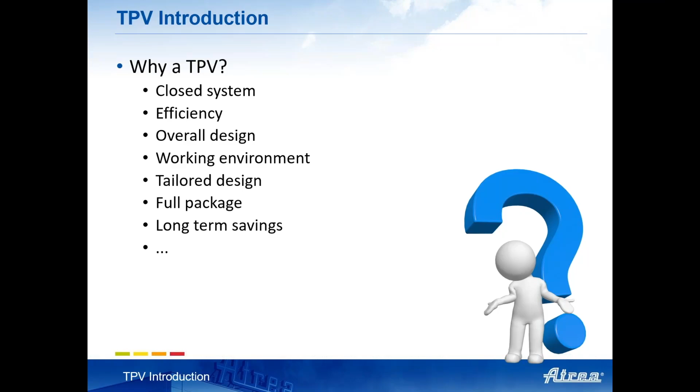This is the basic of basics. In my experience, usually customers are looking for such a solution when they don't have enough space for the installation. But when there is no room for hoods and ducting, you have to take into consideration that a ceiling is approximately 45 centimeters for the full construction, and then you will need more space for the ducting. In special cases, you have connections from sides from other rooms, if that's possible. I'll mention it later.

We have a project in Montenegro where the concrete ceiling is at 2.7 meters, and the lower edge of our TPV is at 2.15, with polycarbonate at 2.35. It's appropriate for works, but it wasn't possible for hoods to be installed, even with side connections. The ducts would be too big.

So some project types would be hotels, definitely. If you have contacts in hotels, resorts, or groups of hotels, you can mention it, send them a flyer or anything. They might be interested because mostly hotels have money and will want to reconstruct their kitchens more frequently than an object like a school. They will invest in it and keep it for 20 years, but hotels are more frequent with reconstructions.

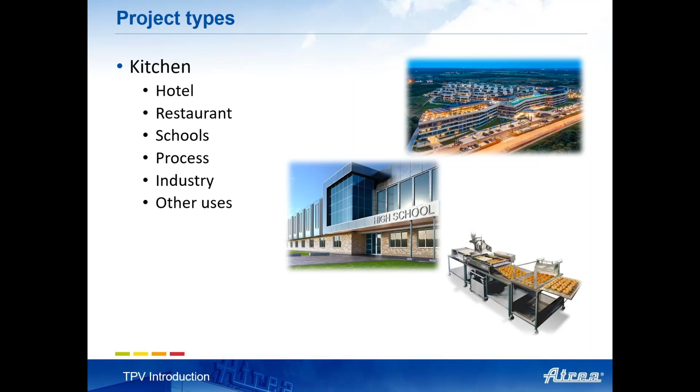So is it worth the investment? We all know that the price of a ceiling per square meter is higher than hoods, of course. Compared to other competitors, it depends on your market, but I believe we are on a good price, especially with the standard TPV ceiling.

Compared to hoods, when designing a ceiling, in the end you will most likely receive a lower airflow of the total room. You also don't have to take into consideration some parts of the kitchen which would have to be passively extracted without hoods - for example, a preparation room. There you can only put a supply duct and passive area with lighting if the room is open, or if there are air grills on the doors.

Lower airflow, of course, there's a caveat because it will depend on the ceiling height. If you have a ceiling at, say, 2.5 meters, then you are okay. If you have it lower, the airflow will increase because there's not enough room for air to spread, so there's more need for higher airflow to catch everything, not to have people bathing in steam. And in case of a higher ceiling, you will need higher airflow to achieve the opposite, because there's a lot more for the steam and grease to travel.

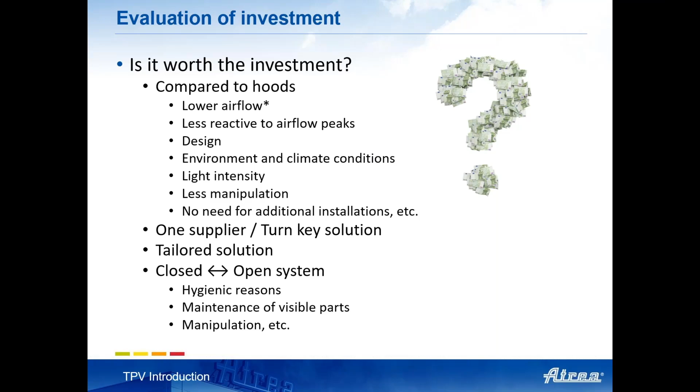So those are the two photos which are popular - you can also show them to customers. As you can see on the upper photo, it's a closed system, so there's no danger of mold producing, but on the photo below, you see there is steam, and you can even see on the wall behind this duct that mold is starting to form.

Probably you've seen these photos - the first and second are after one year of operation. Also, the standard solution for a TPV is that some of the supply air is blown into this upper part, so it's constantly in a small overpressure regime, just to avoid any leakage in case the rubber sealant gets broken, so it will constantly be in overpressure.

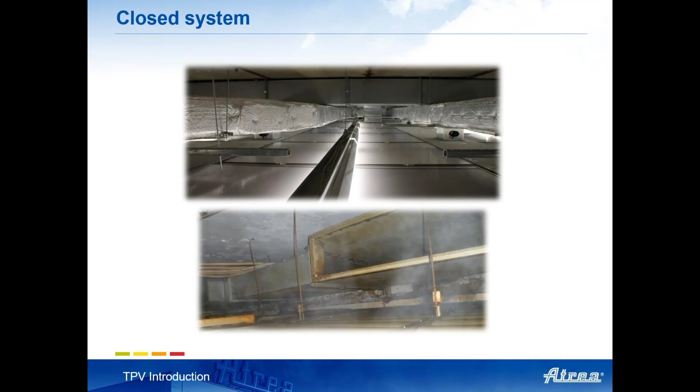So it's a tailored solution, as we mentioned - you can basically integrate other installations, it's only important to know about them at the right time. In the design stage, you'll have to ask your designer if there's a plan for any sensor installation, cameras, or additional lights, spotlights, fire suppression systems like ANSUL or standard sprinklers, or UVC filtration, or basically anything similar which can be implemented into the ceiling.

Because in that case, our kitchen department can prepare additional load bearing profiles which can withstand the weight of a camera, instead of the standard solution, which is meant only to take the load of the polycarbonate sheets.

It's adaptive construction, so it will implement into any room geometry or room purpose. So if it's a process kitchen - we had an example with frying, with the preparation of frozen groceries, you know, you can buy already frozen and prepared chicken nuggets or something like that, or even vegetables. They all have to be somehow prepared, so pre-cooked, and then they're frozen.

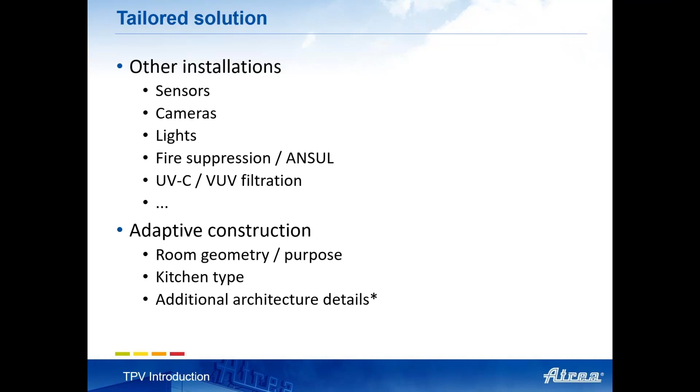And as for additional architecture details, basically the ceiling can be custom made regarding the ceiling color. So the sheets, as for aluminum, can be painted in a different color and not the standard RAL. And there can be some additional profiles which could be used for some decorative lamps. Why not?

So the 3 TPV types which we have, you all know, I hope: the standard TPV with full inox on extract and on supply, with polycarbonate covers with the lights above those, and with Prihoda PMI textile diffuser. The good thing with this Prihoda is that there are a lot of certificates which prove their hygienic use. So this PMI can even be used for medications production or for clean rooms, basically. So this is also an advantage for our ceiling.

The second one is TPVN, fully stainless steel with Prihoda cover option, so you can have perforated stainless steel below it as some decorative design. Or in case the customer is skeptic, because Prihoda will not burn, but it will drop when there is a fire in the room. But in case of the stainless steel cover, the customer is safe of any droppings and nothing will actually burn.

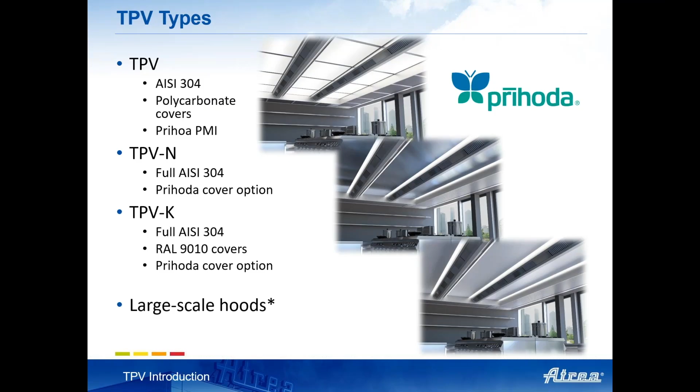And the two latter are approximately 20-25% more expensive than the standard one. And of course, all of those three can be implemented in some form of large-scale hoods. So we will just go through this quickly.

The standard structure of a TPV would be the extract ducts, cover panels, so polycarbonate, stainless or aluminum, and some form of revisions on the pre-wall might be used in case of hard to reach cables for the lights. So you would need some kind of revision on the side panels.

You will be able to see later in one of the projects, we even put the revisions inside of the supply duct, because on the border of the kitchen there was a supply duct and there was no light after the supply duct. So we had to put one more additional light along the supply duct between the wall, and then you cannot reach any of the cables, so we have to make some kind of revision.

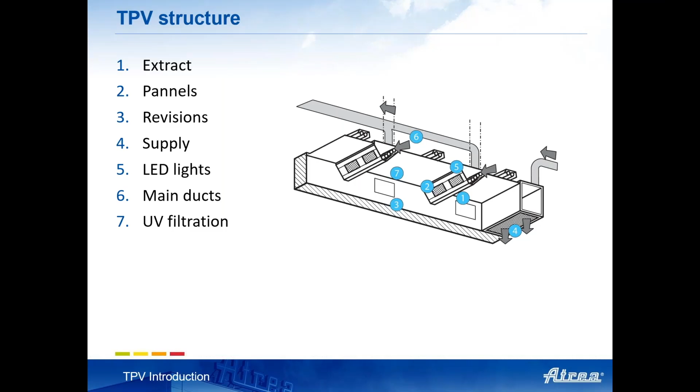LED lights, in case of standard TPV, are above the polycarbonate. In case of K and N, they are along the extract ducts, and the main ducts above the ceiling, and some additions like UV filtration or fire suppression system. So the basic structure, I believe you all know about this photo. You can show it to the customers. There is a short presentation with more of those photos.

So basically some standard scheme of the simplest TPV ceiling, just so the customer can have a small insight in the structure, because you receive a drawing in 2D and it's hard for the customer to perceive how it looks. So a good recommendation is to use as much as possible those 3D schemes of the system.

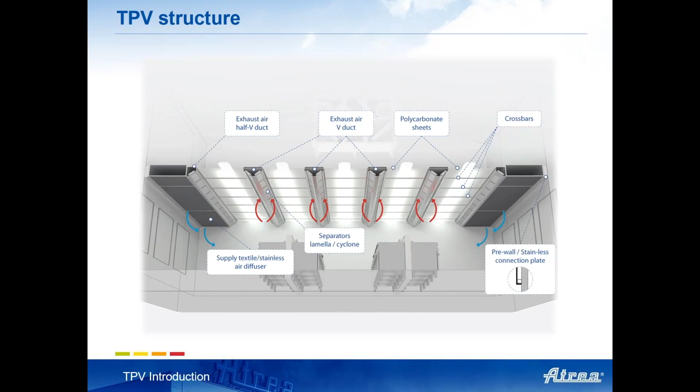So of course separators can be lamellar or cyclonic, same as for the hoods. Supply, as we mentioned, can be with some additional covers, and this pre-wall is always built with some small amount of tolerance, because if you measure the room before the tiling, and you get the confirmation that the tiling will be 1 centimeter thick, in the end it can be 2 centimeters thick. So there is always some small tolerance of 1-2 centimeters plus minus, just to adapt the construction to the room.

This is the upper view, so you can offer our basic unit if possible, if the airflow will allow you, if it will be not too big. But we had some cases where one air handling unit is used for the main cooking center, and one smaller unit is used for the dishwashing area and convection ovens area, so you can always combine that. And the good point with that is that the second one will not have to be maintained that often.

So you can also mention that to the customer, to the designer, to put one unit for the main cooking center, which will be overloaded and which will have to be more often checked and the filters replaced and cleaned. And the other one can be used for steam only. As for the control dampers, those are a must on every ceiling. So you have to regulate somehow the airflow which will go through to the connection port.

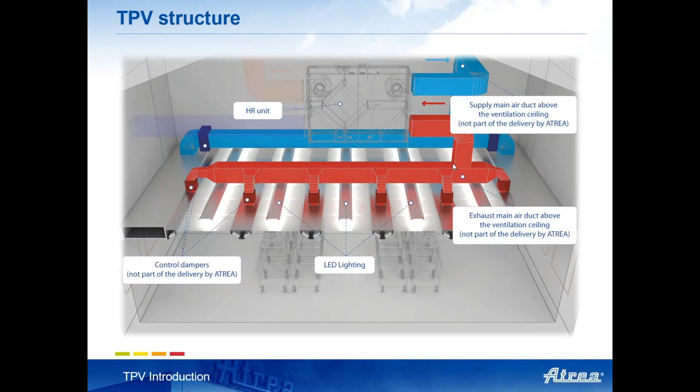So let's say some basic project steps. I will open them all just to be visible. So the inquiry: you will want to receive a kitchen layout, drawings of the ventilation system, of the architecture of the building, with as much detail as possible. So section views are a must. I don't know how it is with your market, but sometimes the architecture doesn't follow the progress of the ventilation drawing, and then you don't receive any section views.

So you have to ask for additional details like window height, room height, any, how do you call them? Beams. Yeah, beams. So the beam height, which is not visible in the floor plan. And it is really important when taking the proposal design into consideration, not to have any mistake in the proposal drawing and not to have too many questions from the customer in the end. So all of those mentioned will affect your calculation as well.

So you will want to receive all the details of the kitchen appliances. Sometimes you can make assumptions with the designer. So in cooperation with him, if you have a floor plan without any details about the power inputs of the appliances, you can propose something and make a calculation based on that, if he is okay with that, if he confirms that it will be used, and later it can be changed in the overall project progress.

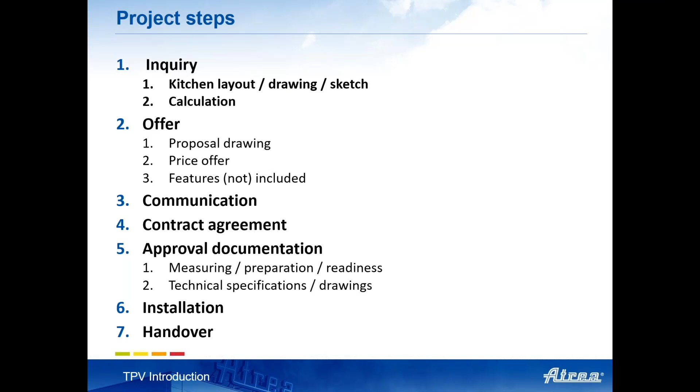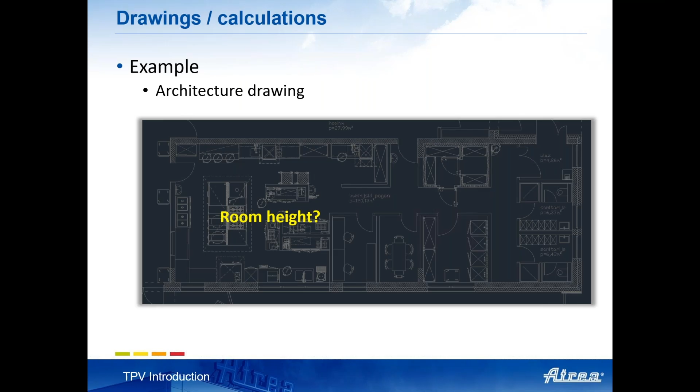As for the drawings and calculations, which we mentioned, you will want to ask if you don't receive any section views. So you will want to ask what is the room height, some details like windows height, some passages for food issuing. Those can be fully open, or there can be some kind of window form for the food issuing, so the kitchen can be closed after it's done with the work. So you want to have all the details about that structure.

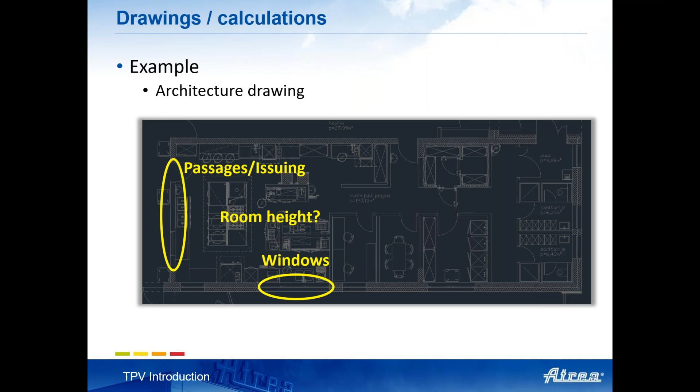If it's some kind of larger door or window, it will have to have some kind of load-bearing structure above it. Similar to, you can imagine the jewelry store, which has those rolletta, how do you call that? But here you put it down, you know, there has to be some kind of structure above it.

Okay, and barrier walls, of course. So you see that there are a lot of smaller, thinner plasterboard walls. Sometimes those are built only 1 meter high, 1.5 meters high, just to have some separation between the kitchen appliances. Or they can be 2 meters high to separate the dishwashing room from the main kitchen room. So you want to know their height, because if it's going up to the full height to the concrete ceiling, then our guys will have to take it into consideration when designing the ceiling.

And basically any detail which is suspicious to you, you have to go through it with the designer, just to avoid any communication delay, proposal drawing iterations. So basically, as good as you prepare the first communication towards our kitchen department, you will receive one proposal and that's it. You can immediately communicate it to the designer, installer, customer, and it's gonna stay there in the project. There will be no more changes.

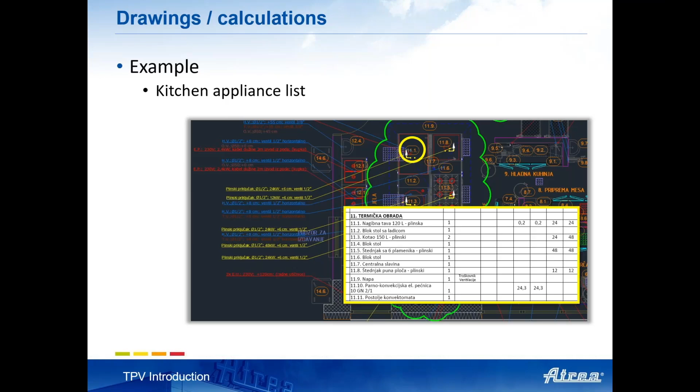Yeah. Okay, and one more point regarding the layout. Yes, please. Slightly more details, like windows, beams, and so on. Yes. The first inquiry, if they don't know that they will get this project, ask all these details first? Or they say, okay, we know the costs, we know everything approximately, it seems good. Are you then asking, or in the beginning, providing information for production?

You will want to have it even from the beginning, because of the exact costs and of the possibility of the ceiling installation. Because if you have some beam, a concrete beam or even wooden beam, steel beam, you have to know its height, because there has to be room for the ceiling installation and for the duct passages.

For the ducts, there might be, let's say, another solution to go from another part of the room, but mostly that's not the case because the ducts are big and you have to consider it. So I would definitely recommend to ask as much as possible, because it's going to affect the drawing.

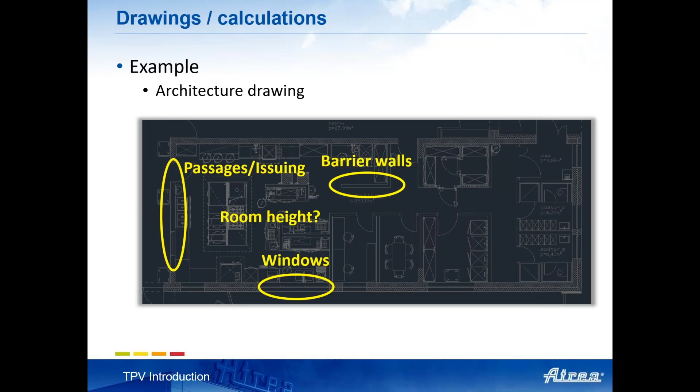So just communicate it to the customer that we cannot offer a concrete proposal drawing and price offer without that. So you can just mention it like that. You need to have it, because it might turn out that in the end it's not possible to install the ceiling, you see. So just ask as much as possible regardless of the project stage.

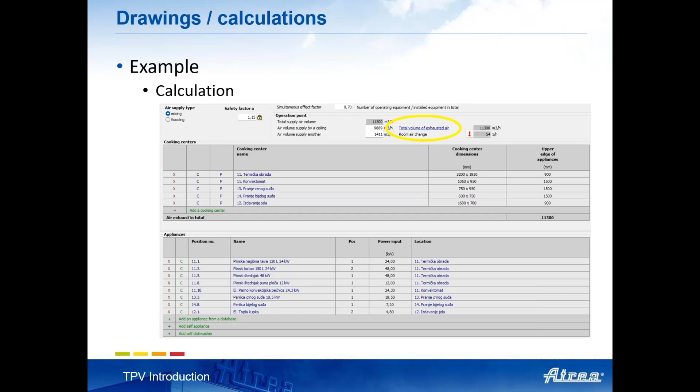Okay, so as for the calculation, this is basically the end of your suffering of the calculation. We will go through the whole calculation later, but this total volume of exhausted air will provide you with a PDF which you can communicate directly to the designer. Because when you print a normal technical specification, you will not receive this detail of calculation. So you will want to export it to PDF like this and attach it together with the overall technical specification.

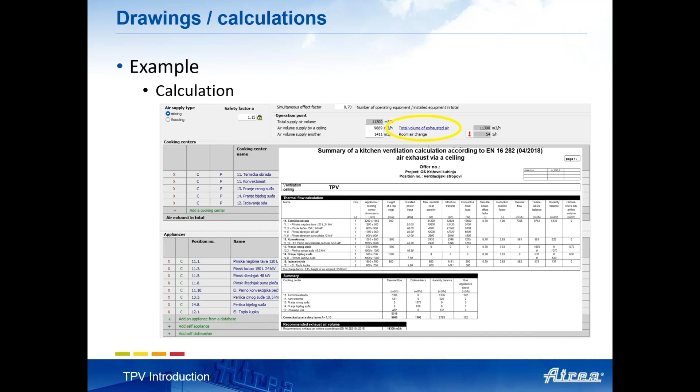So you also have to take into consideration, I mean, our guys from the kitchen department will help you with this. But just so you know, to mention to the designer, there has to be room for the supply air somewhere. You cannot pack 80% of the room with extract and then have supply only 10 meters farther, because the supply air will not reach the far point of the room. So you have to spread it evenly to have constant airflow to the whole room.

So one dishwasher, I mean, we will go through this example later also, but one dishwasher is in this part. This is for black dishes, so all the stainless, let's say, elements of the kitchen. And another dishwashing area is, if I remember correctly, here. It should be here, yeah, or even here. We will see later. No, it's here.

I'm sorry. These are preparation rooms, so there is no need for much extraction from the preparation room. So one dishwasher is here and another is here. This is a part for the convection oven. This is the main cooking center, and this is the food issuing part. So ideally, the supply would be here to avoid any leakage in another room.

And just one more point to mention. This was the project where we separated the airflow onto units. So one unit was used only for the main cooking center because it's also with the UV filtration, and another unit was used for, let's say, lower demand rooms of dishwashing. And this is just, let's say, an example, a template for a description text.

Now it's also with some added points like TUV certificate accordance. So when you communicate to the designers, I believe you have some kind of description of the overall project. And I don't know if they ask you for the description text like it is for the units, you have to have it. I don't know if you communicate in Excel or in Word or anything, but just put some basic descriptions for a ceiling. We can share this if you would need it, if it wasn't shared already. And you can just put some details about the certificates in it, because then it's going to be harder to replace from the competitor.

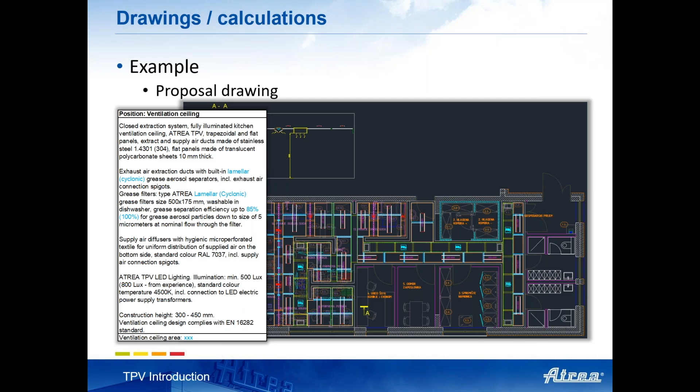So you have some templates for that? Yeah, I can share it. Why not? And as I said, just add basic points for the description and add some points which will protect you from the competitors, from the replacement. So as for the competitors, some main examples are Halton, which is, I believe, present in all countries, which is a closed system and is packed with all possibilities.

I have a question for you. So we have a project in Carton where they have an application with a self-cleaning system. Do you know something about it? Self-cleaning. Yeah. So the question about Halton, we replaced one ceiling which was Halton. Okay. We are not in the project Carton, but in the future I am going to touch it to know what it is. Yeah, I get it. Unfortunately not. Halton is packed with features. That's why it has two times the price compared to us, or even more. But this self-cleaning system is not possible on ours.